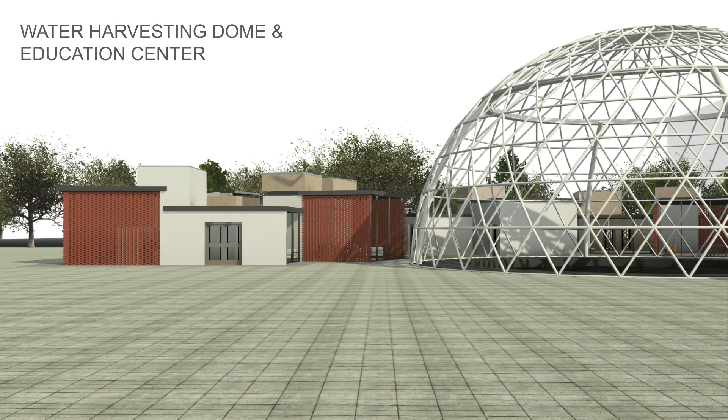Welcome everyone, myself Patel, a student of architecture. Today I will be presenting a concept for a water harvesting dome and education center.

We begin by proposing the challenges we are facing in the world, linked with my country India. Globally, issues include climate change, wars and conflicts, water and food insecurity, and biodiversity and nature crisis. While in India, the challenges are increasing population, inflation, and extreme weather, but all are somehow interconnected.

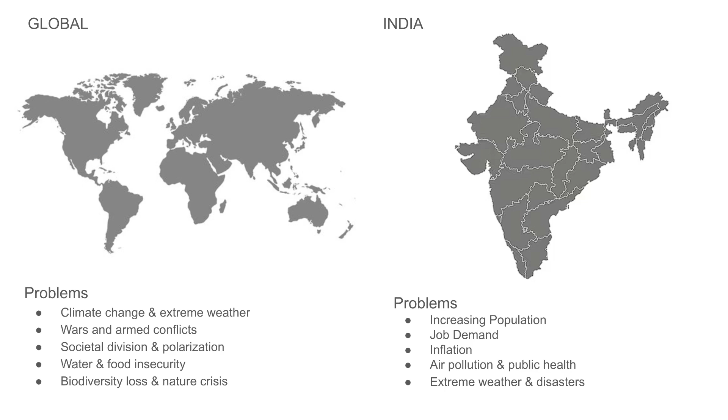Here we will talk about a problem regarding water. On a global level, we are facing issues such as rising sea level and low underground water level. While in India, higher population means higher demand of food, home, water, and security. And these demands lead to inflation.

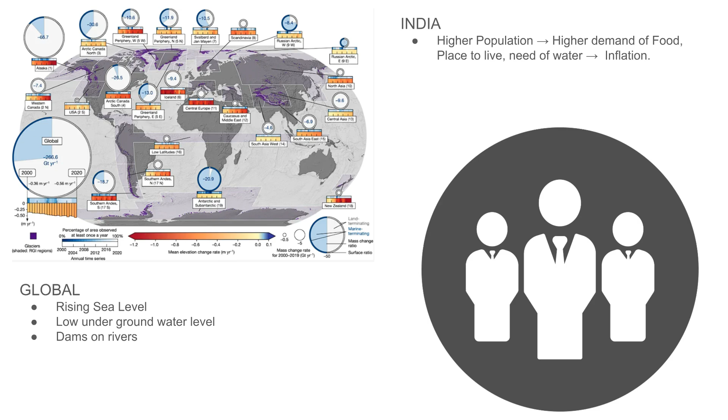What have we done to solve these issues? Well, honestly, nothing. We have signed the Paris Agreement, Europe has developed a sponge city concept, and we have started living on water. But these are not solutions.

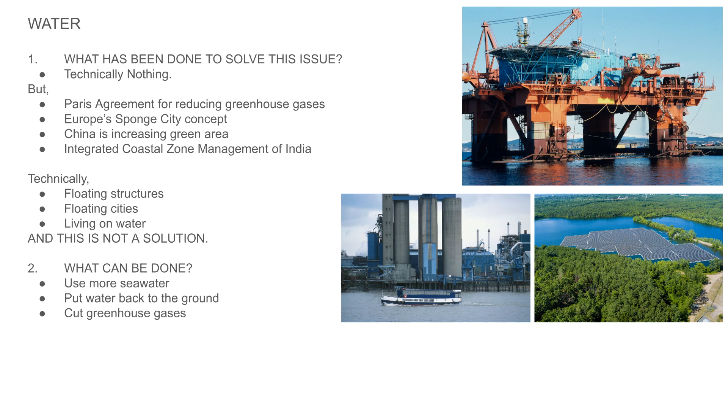What we can do is start using more seawater. We can recharge groundwater and reduce the use of greenhouse gases. Yes, we have started using seawater, but not in a way that affects it negatively.

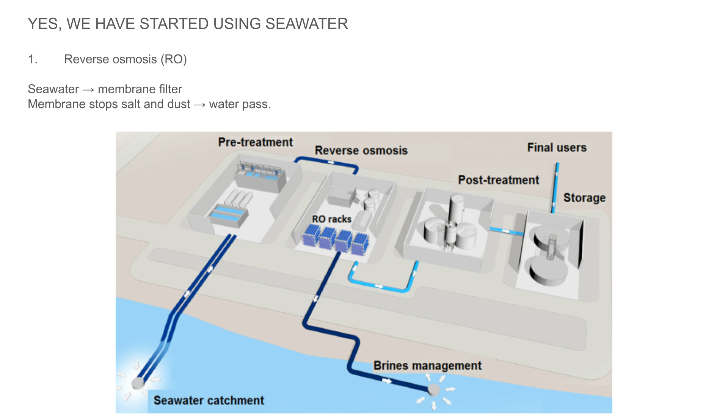One method to get fresh water is reverse osmosis. In this method, seawater goes through membranes. The membrane keeps salt and lets water pass.

Another technique is distillation. Heating seawater creates steam, leaving the salt below, and the steam cools down on the upper surface.

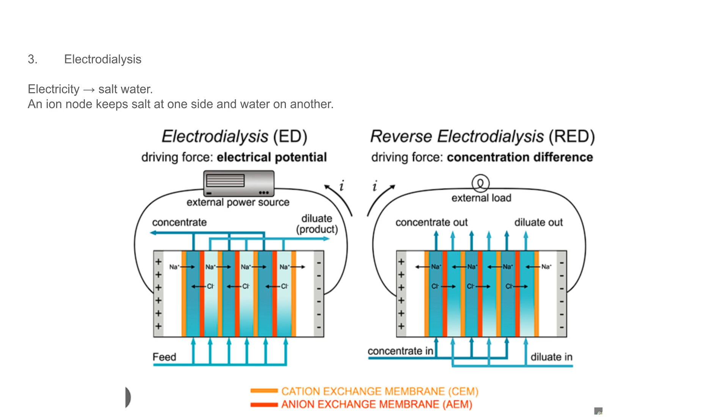Electrodialysis uses electricity to separate salt and water. An ion node keeps the salt on one side and the water on the other.

The fourth method is freeze desalination. We freeze seawater and try to make ice. Water freezes first and salt does not. We separate ice and salt water and melt the ice to get water.

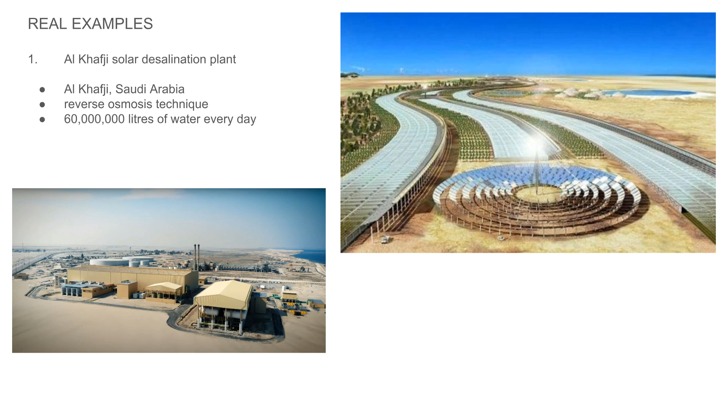The Al-Khafji solar desalination plant in Saudi Arabia is a real example. It uses reverse osmosis to produce 60 million liters of water daily.

The Neom solar dome is a concept. Also in Saudi Arabia, a futuristic city called Neom proposes using distillation, which requires no high-tech pumps or filters.

I want a natural way to get water, which can be proposed in India. It must be low maintenance. There must be designed some learning space to know and research more about water harvesting. And I really do not want to use additional energy to operate it, no membranes and no chemicals.

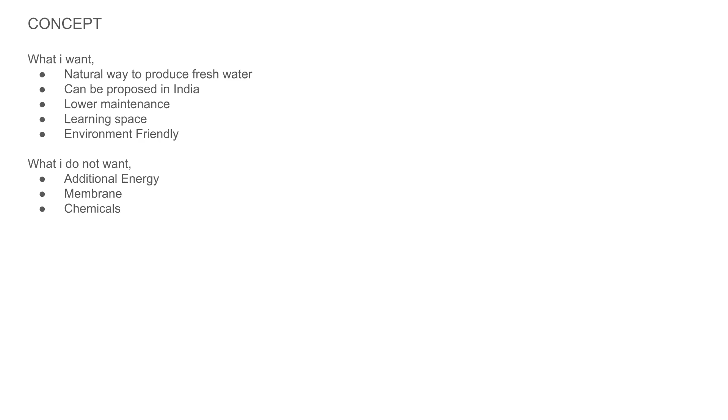The concept is simple. There would be a constructed transparent dome. Below it there would be a black painted surface where seawater will be stored. Sunlight comes, water gets converted into vapor and goes up.

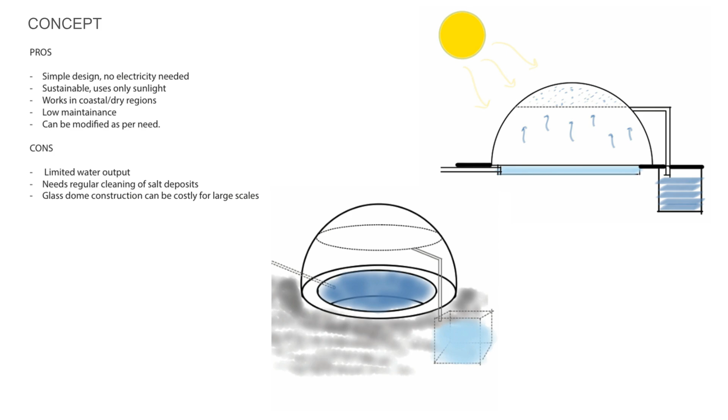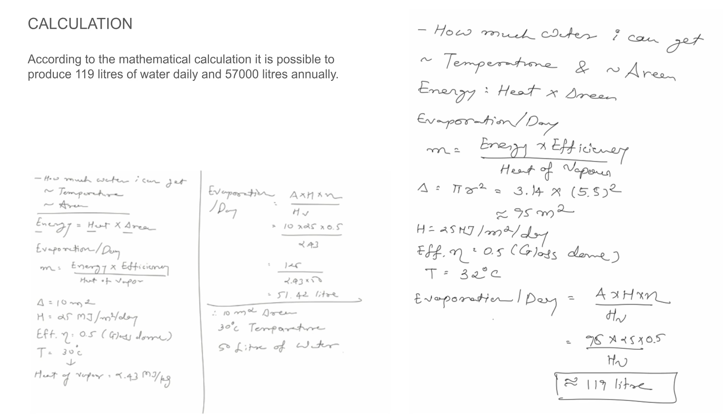This dome will use 50% of the energy. Based on mathematical calculations, the system can potentially produce around 119 liters of water daily, with an area of 95 square meters, totaling 57,000 liters annually.

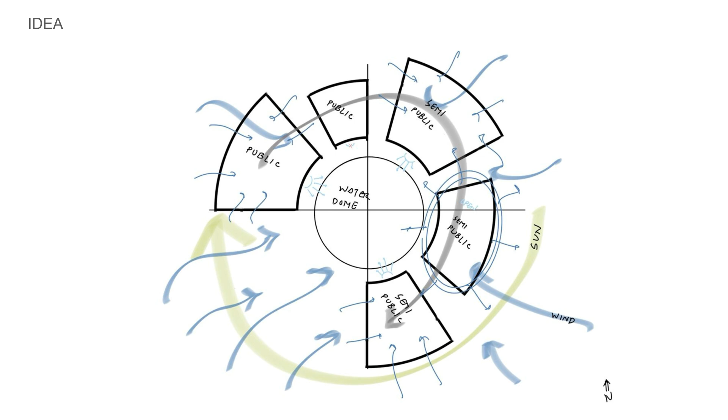The idea incorporates the water dome at the center, surrounded by public and semi-public spaces, considering the direction of the sun, wind, and view. You can see how it will be placed in the picture above.

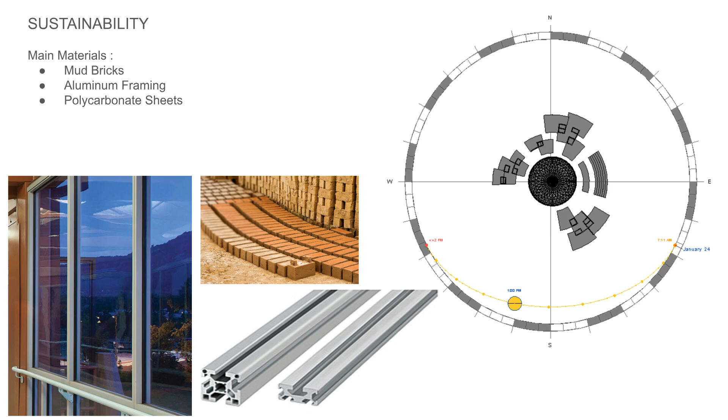The main features are the central water harvesting dome, administration department, and educational blocks which are arranged around it. Sustainability is prioritized by using materials like mud bricks, aluminum framing, and polycarbonate sheets. And the orientation of the structures helps to correspond with climate and give sunlight, proper ventilation, and wind.

Where is the innovation? It is present in a small roof opening, which allows sunlight and ventilation, and perforated brick walls, in other words brick jaali, for privacy, light, and air circulation.